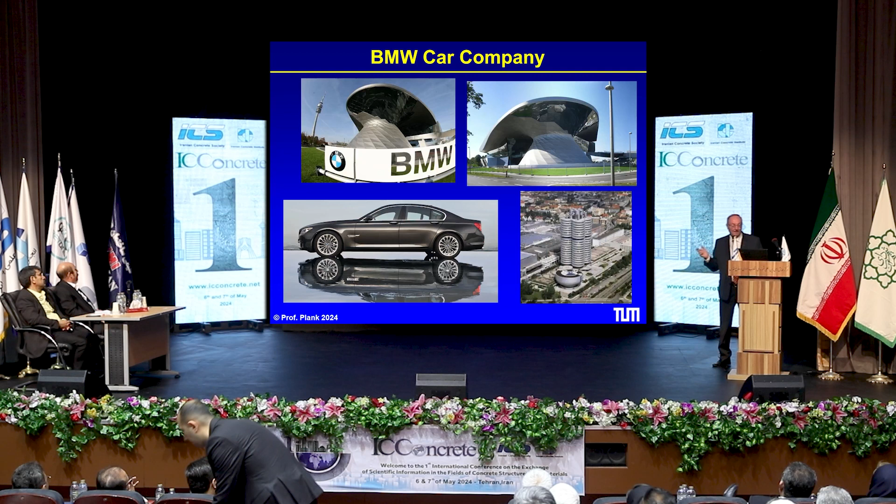A speciality of our university is that we have close links to the industry. And in the Munich area, there are numerous large and also mid-sized companies in different fields like BMW, which you probably know. And our university had some rather well-known students like Rudolf Diesel, who invented the diesel engine, or Willy Messerschmitt, who invented jet propulsion, making it possible to go from the propeller airplane to the jet airplane.

Then our university had 6 Nobel Prize winners so far, and I'm in the chemistry department, and 4 of these Nobel Prize winners are from chemistry.

About our research, we focus on cement chemistry here, and then admixture chemistry. This is really our specialty worldwide. I think we are one of the leading groups in this field. And we study the interaction between cement and admixtures. We also work on other chemical compounds for dry mix mortar and so on.

And from the application, it's concrete, dry mix mortar, energy harvesting materials, as was mentioned. And a speciality in our group is we work on additives for oil well drilling, cementing, and fracturing fluids.

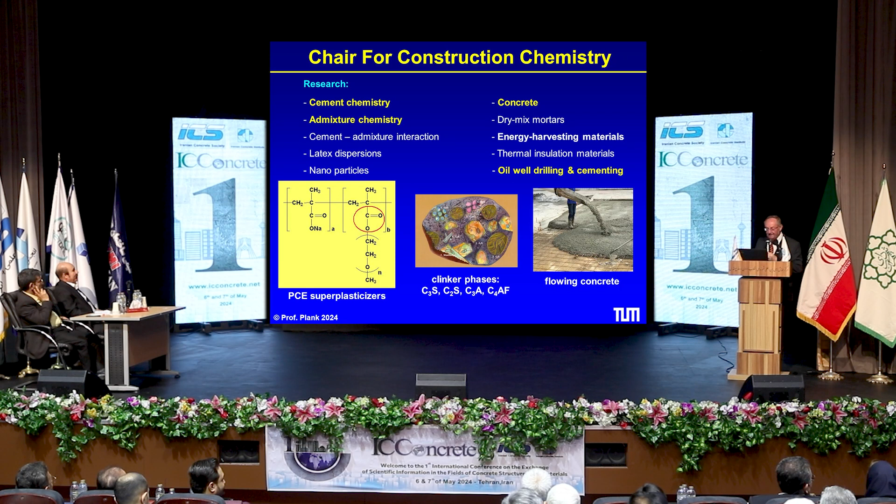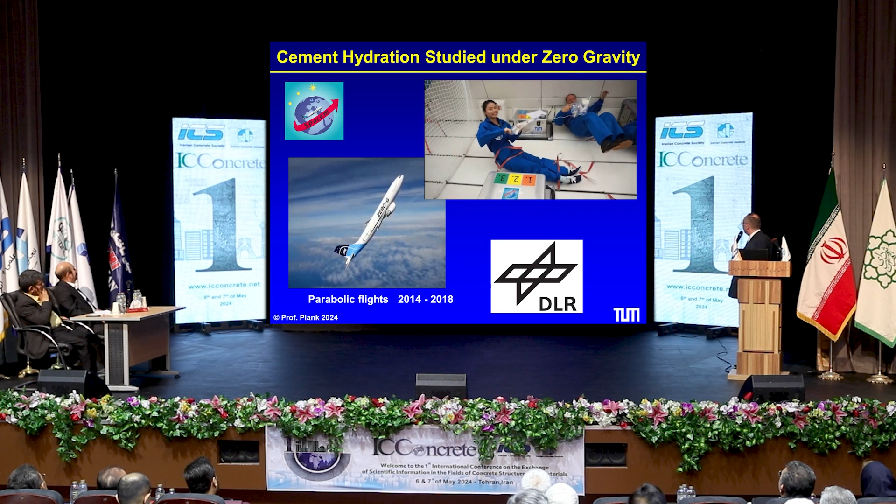We had the unique opportunity to do experiments with cement under zero gravity. As you can see here, we performed them on parabolic flights where you have zero gravity. And by the way, this is Dr. Lei, one of my students who is a professor in China now. We got very interesting insights into the hydration of cement, especially the formation of CSH.

High performance concrete we define as a concrete which reaches very high early strength within a day, ideally within 16 hours, 10 megapascal, and the final strength has to be beyond 60 megapascal, like 100. At the same time, it should be easy to place, fast flowing, and also easy to pump. I will talk especially about this because this is not so easy to achieve in such a concrete.

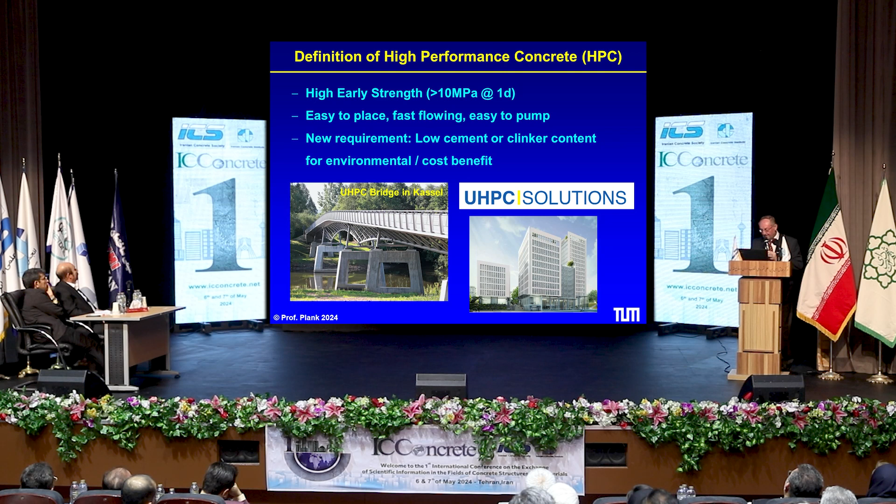And a new requirement is that it should have a low carbon footprint because of a low cement content or a low clinker content. And this is not easy to achieve.

Superplasticizers, PCEs, are necessary to achieve this. At first, a short overview of the PCE technology which we have nowadays. The first PCEs in 1981 were MPEG.

PCEs based on methacrylic acid and methacrylate ester. Then came the allyl ether PCEs from Nippon Oil and Fats. And then at SKW, we developed the VPEG PCE.

This technology was acquired by BASF, as some of you may know. I framed these two in green because these are still the most widely used PCEs in Europe. In Asia, it's completely different. There, HPEG and IPEG or TPEG PCEs are dominating. They have different alcohol here, as you can see, compared to those.

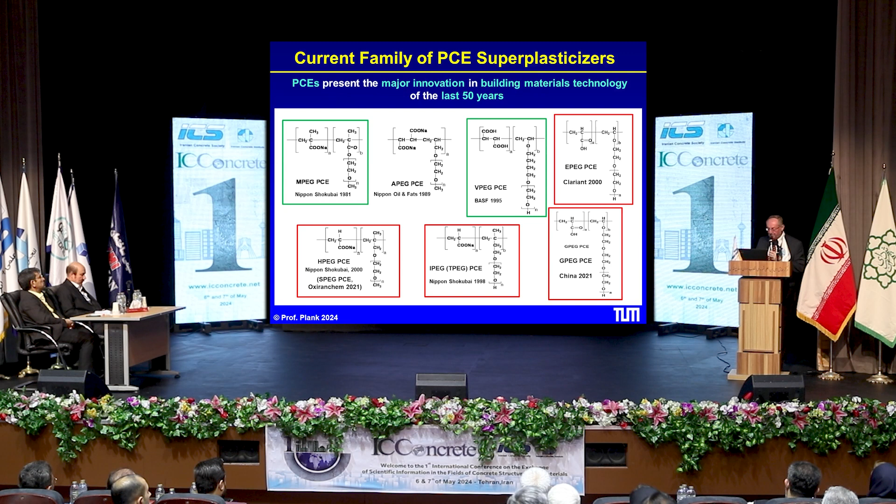Very recently, EPEG PCE, which has an ethylene glycol unit, and GPEG PCE, which has a diethylene glycol unit, were introduced. I will show you later that IPEG is probably the most effective and cost-effective type of PCE. As this is really very new on the market, the PCE industry is continuously developing further. Although it is 40 years of PCEs, it's by no means finished.

Now, the previous speaker talked about water-reducing PCE. Here it shows the structure. This is a high-range water-reducing PCE. It has many carboxylate groups in the main chain and a few but long side chains.

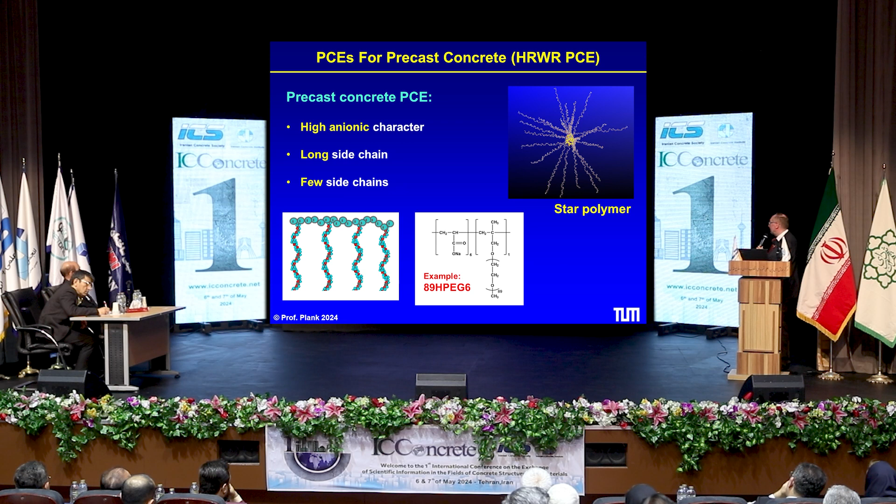This is a typical composition from HPEG PCE. 89 is the number of EO units here, and 6 is the molar ratio of acrylic acid to the macromonomer. So these high-range water-reducing PCEs actually look like a star polymer.

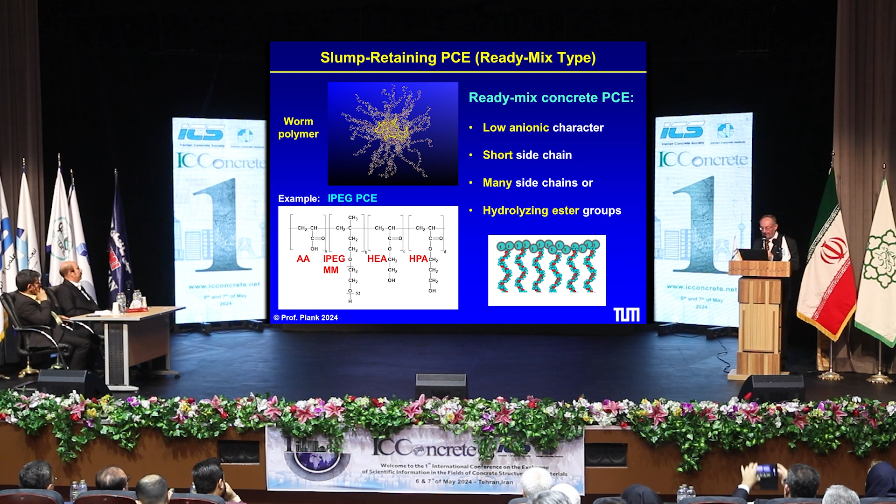Then a slump-retaining PCE, which is used in ready-mix, has many side chains, as you can see here, not so many carboxylate groups. Nowadays we also use hydrolyzing esters in the PCE, hydroxyethyl acrylate and hydroxypropyl acrylate, because they give super long slump retention. You can reach 3 hour, 4 hour of slump retention. In some countries like China, this is very popular.

Then I mentioned EPEG PCEs, where we have the ethylene glycol unit. They were, I should say, again introduced to the market in 2019 in China. Oxiranchem was the first to produce them. And why are they superior?

Their production takes only 1 hour of polymerization time versus 3 hours for HPEG and IPEG, and on top they are also more dosage effective. So this is a very interesting new development, and I'm sure in the industry over the next years we will see more and more EPEG-based PCEs on the market.

Now I come to a major challenge for the cement and concrete industry, and this is the CO2 emission. When we produce 1 ton of Portland cement, we release almost 1 ton of carbon dioxide, and therefore the cement industry contributes very much to the CO2 emission and global warming.

If we look at the list of top cement producers, we see that China is of course #1, followed by India, US, Vietnam, Turkey, and Iran, and Germany. We produce about 30 million tons of cement, so we are a relatively small cement producer.

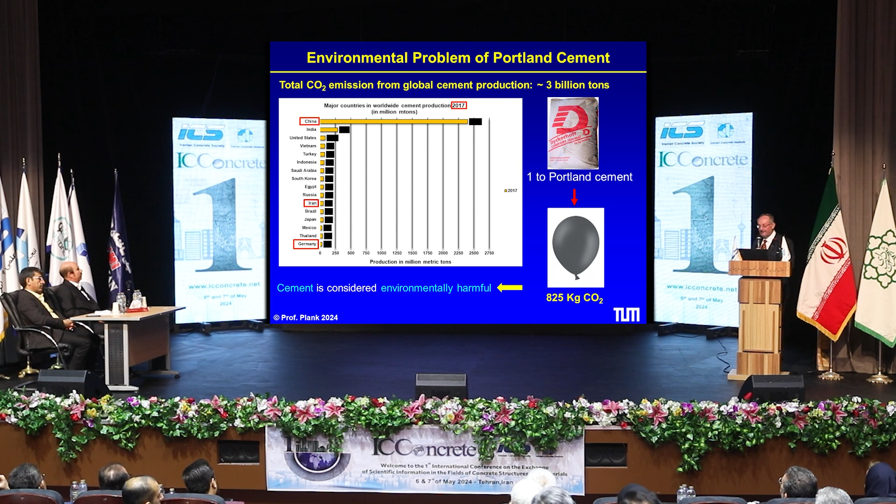But the total global cement industry produces about 8% of the total CO2 which is released. And by the way, this is more than a country like India releases, so it's really significant and we have to do something about it.

What can we do? We can capture the CO2 in the cement plant from the exhaust gas, compress it to a supercritical fluid, and then transport it, let's say, to oil fields and inject it into depleted oil fields. This we call CCS, carbon capture and storage.

It's a good way to dispose of CO2, but very expensive. It's already done in the North Sea, so we know the cost. The cost is about 80 euros per ton of cement, and this cost will be added to cement, so this will make cement very expensive.

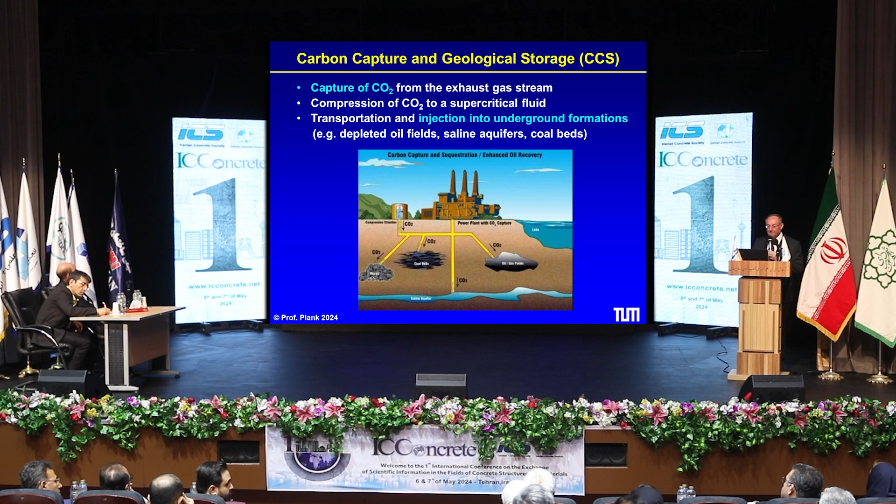The other possibility is that we use pozzolans, as has been mentioned in the presentation before about natural zeolite, and basically reduce the clinker content in the cement by using fly ash, slag, and most recently calcined clay has become very popular. By doing so, it is possible to become climate neutral with the cement formulation.

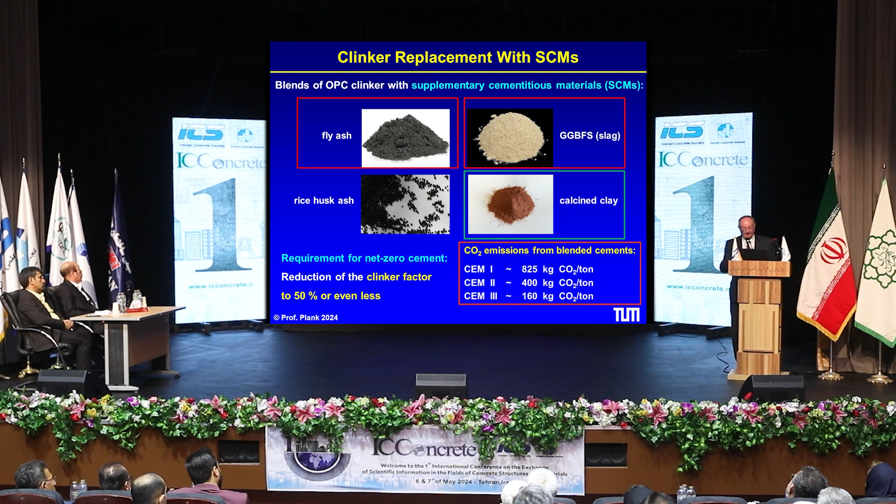We need to be below 450 kilo to be climate neutral, and so this is possible. It means the clinker factor in our cement has to be less than 50%. So for the cement industry, you can see this is a very big challenge and a very big change.

Now, cement comes with a high CO2 emission, concrete actually not. Here we have the global warming potential of concrete. It's 130 kilo CO2 per ton or 300 kilo per cubic meter.

Which is not too high, but the problem is we produce such an enormous high volume of concrete, about 25 billion tons, and therefore this large CO2 footprint. We analyzed the CO2 contribution of different components, and as you can see, cement is 96%.

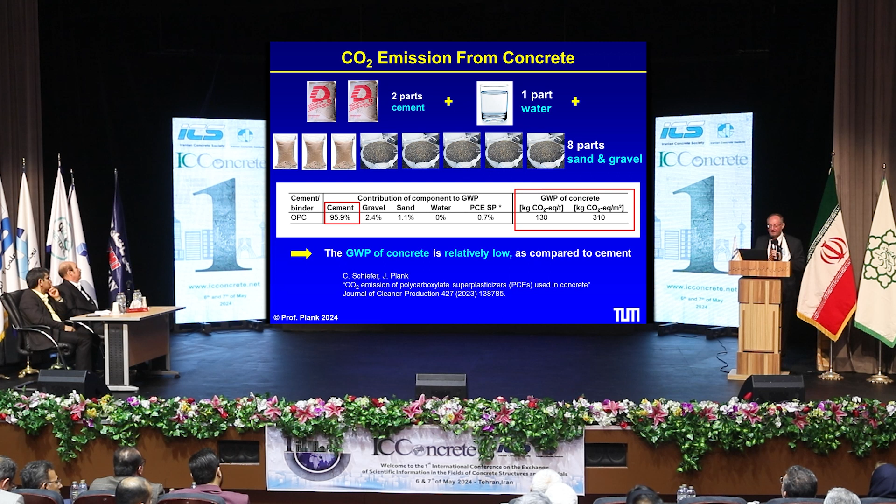This is where the CO2 emission comes from. The PCE is basically close to zero, not important. So the global cement industry has two ways to reduce their CO2 emission. Concept one is this carbon capture and storage.

This allows the industry to keep their current business model, but the cost will be very high. We know in Europe the estimated price for cement with carbon capture will be above 200 euros per ton. I heard that the price of cement in Iran is only 2 or 3 euros per ton.

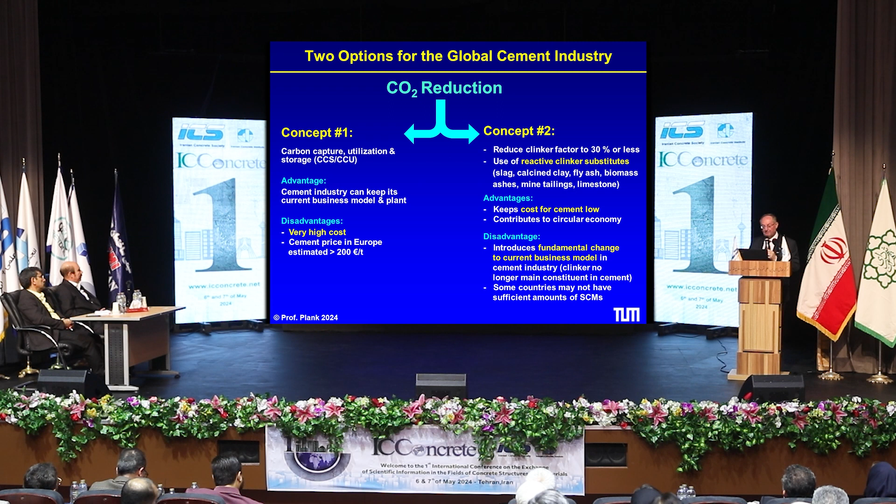So we are far away, and it shows what a cost burden this technology would bring. The other concept is to dilute the clinker with reactive SCMs, such as zeolite. This keeps the cost low, but introduces a fundamental change to the current business model of the cement industry, because clinker becomes a minor component and other materials become the major component. It's a real challenge for their business model. We'll see what the future brings.

About slag cements: especially in countries like Vietnam and India, slags are very abundant, and a lot of work is done there. Also in Western Europe, like UK and France, we cooperated with companies on low clinker cements. We reduced the clinker content to 40%, 30%, 15%, while increasing the slag content. So the clinker is no longer the main component, it's the slag.

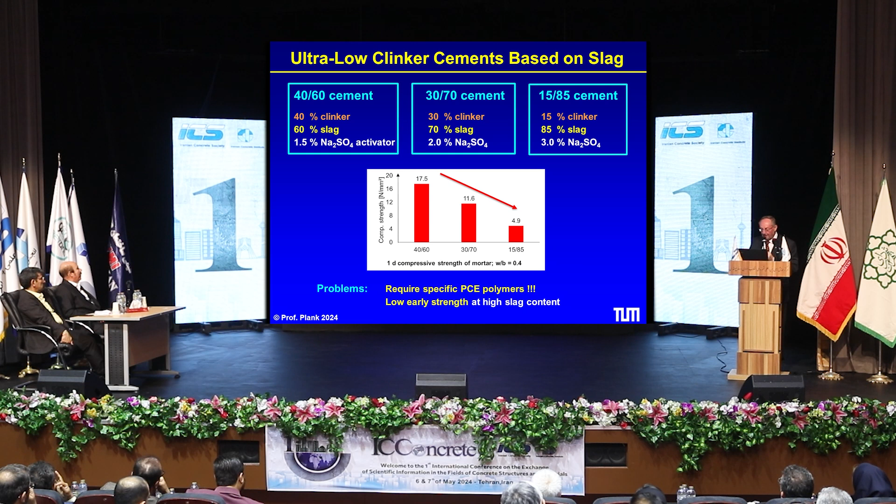Because slag reacts relatively slowly, we need an alkaline activator - here we use sodium sulfate. The problem with reduced clinker content is that the strength gets lower - this is the one-day compressive strength. So we need to find a way to increase strength, and the easiest way is to reduce the water to binder ratio. But then you have a workability problem, and this is where the superplasticizer comes in.

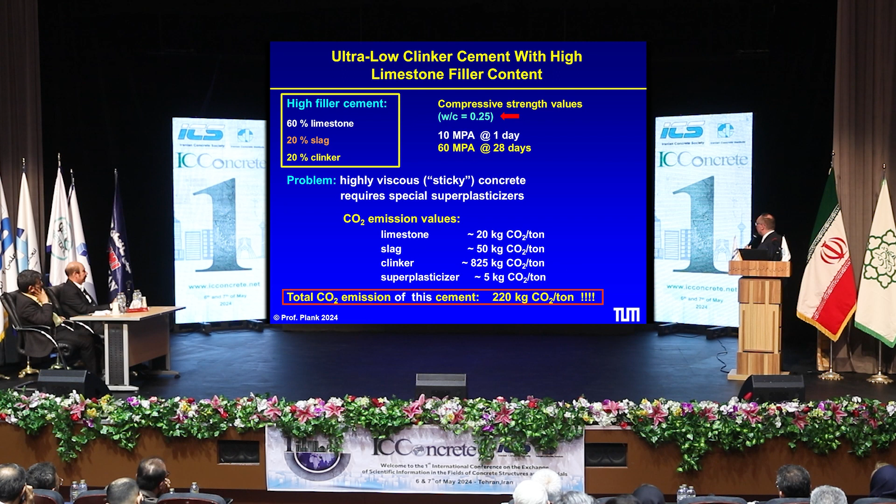So with this cement you have a very low carbon dioxide emission. We call it a climate positive cement, meaning it reduces CO2 emissions more than needed, and still we get very attractive strength data. But the key is the superplasticizer - if you work at this water to cement ratio, you need a very powerful PCE. Some other examples - this is really what we work a lot on in Europe.

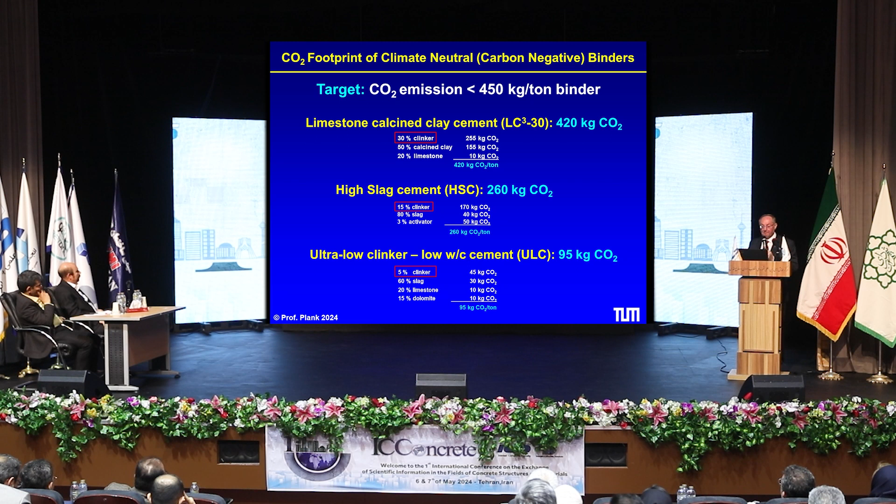These climate neutral, carbon negative binders, like this one with calcined clay - please note it's LC3-30, which means it has only 30% clinker. The common LC3 has 50% clinker and therefore is not climate neutral. Or a high slag content with 80% slag, or this ultra low clinker cement with 5% clinker, which is something they use in India. So you see it's possible to formulate very climate friendly binders.

A problem with slag cements is we need alkaline activators to get early strength, like sodium sulfate, carbonate, silicate, sodium hydroxide, and we use them in relatively high concentration, like 2%, 4%, even 8%. In these activator solutions, normal PCEs are not soluble, and if they don't dissolve in the water, they cannot be active as a superplasticizer. So when we use these binders with these activators, we need new superplasticizers.

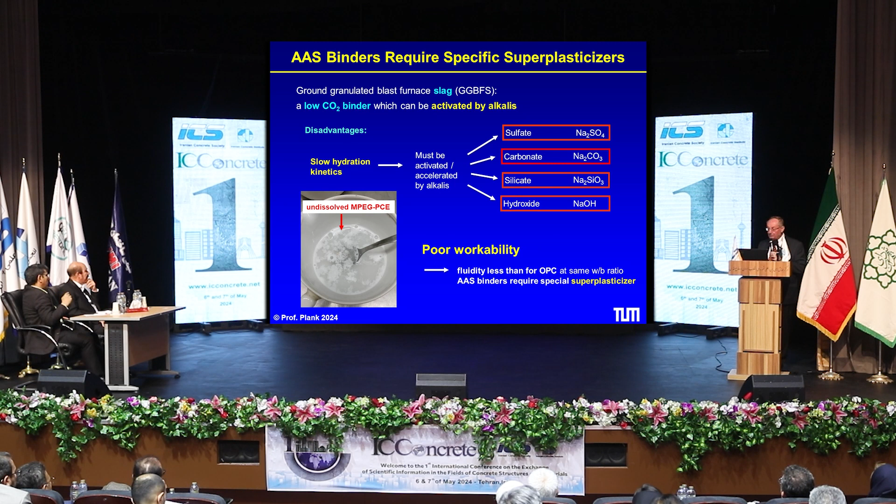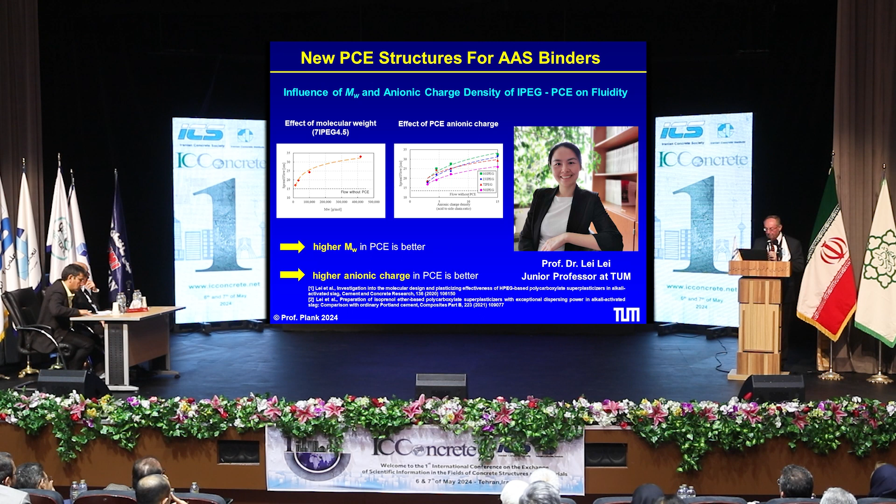Dr. Lei, when she did her habilitation at our university as a junior professor, worked on IPEG or HPEG PCEs, which dissolve in these activator solutions and are effective. She found that you need a higher molecular weight and also a higher anionic charge, and then you have excellent superplasticizers even for those systems.

Another solution for these slag cements are so-called zwitterionic PCEs, where we incorporate a cationic monomer also into the PCE. In a slag cement, they give very good fluidity and also very long slump retention, 3-4 hours, so they work very well. The only slight disadvantage is that at high dosage they reduce the very early strength - this is the one-day strength - but after 3 days there is no such effect anymore.

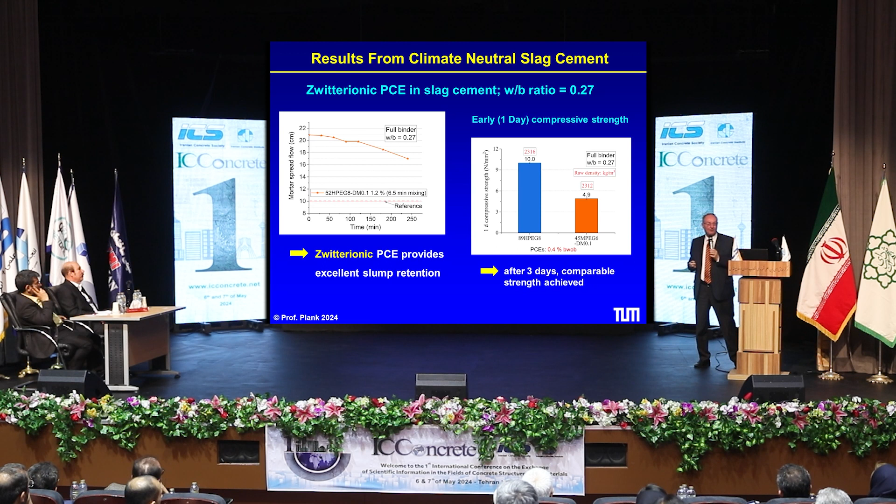So what I want to say is these new green binders require differently composed admixtures. We have to change the molecules to be effective in those systems, and the PCE industry has many ideas how to accomplish this.

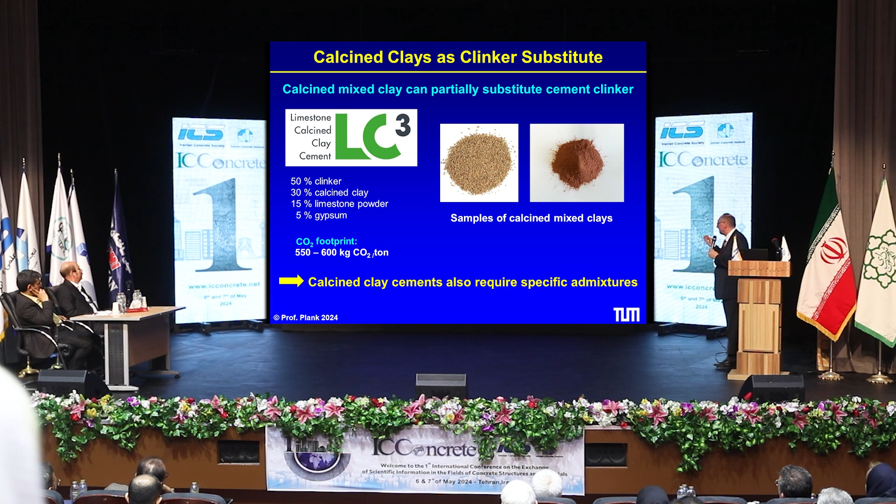Now, calcined clays are talked about a lot, especially LC3. Here you see the LC3 formulation: 50% clinker, 30% calcined clay, 15% limestone powder and gypsum. This has a lower CO2 footprint, but it is not climate neutral. So it's a big step forward, but not what we really need to accomplish, and therefore we are working very hard to improve it.

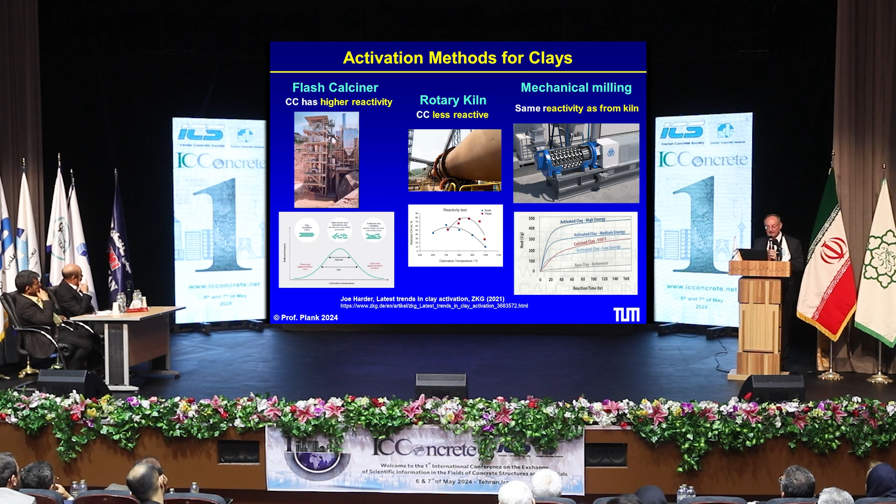Now, calcined clay, there are different ways to do this. In a flash calciner, it gives the highest reactivity of the calcined clay. In a rotary kiln, maybe this is more convenient, but the reactivity is a little bit less. And very recently, ThyssenKrupp introduced a mill where you take the raw clay and just mill it, mechanically activating the clay. It's the cheapest and most convenient way to have activated clay as a clinker replacement.

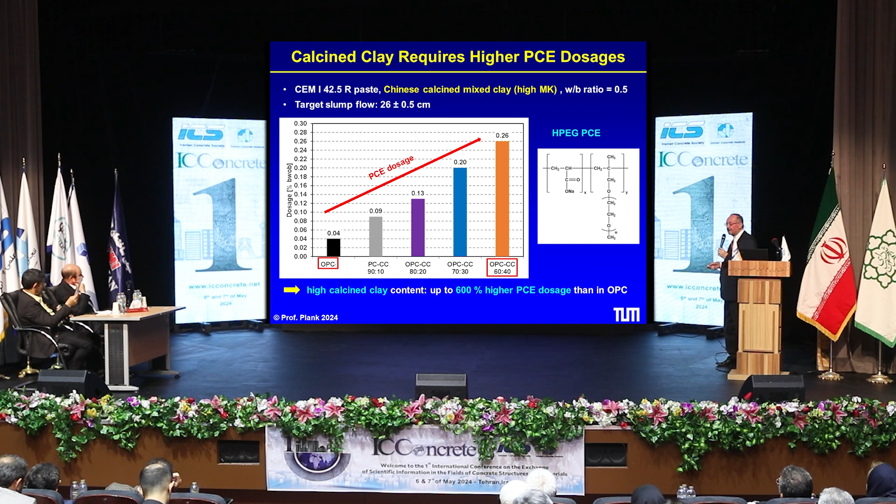Now, a commonly known problem of calcined clays is that they require much higher PCE dosages. If we substitute OPC with calcined clay more and more, you see the PCE dosage goes up very much. Here we use the HPEG PCE, especially here where we used a calcined clay from China with a high metakaolin content. If the metakaolin content is high, this calcined clay needs a very high PCE dosage.

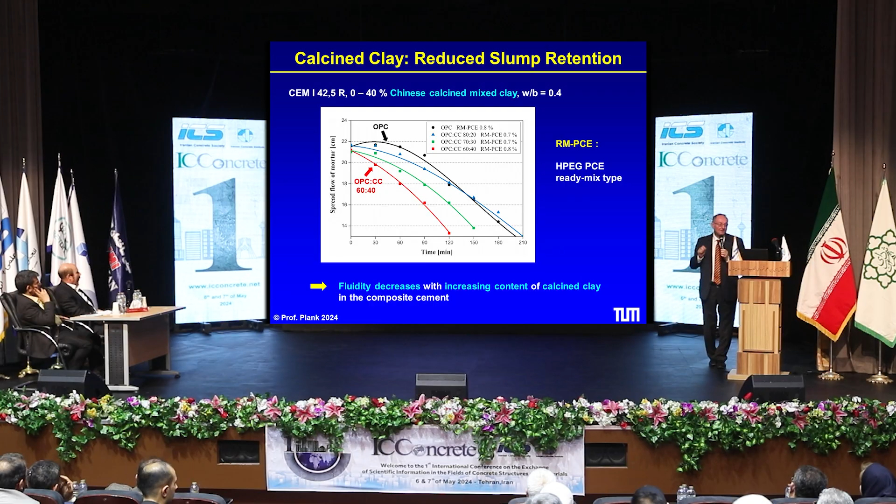Obviously this is not very good because it increases the cost. Another problem of such calcined clays with high metakaolin content is that slump retention is very difficult to accomplish. The previous speaker mentioned this topic of slump retention and the different technologies available, but all these existing technologies do not work in such a blended cement where we have, let's say, 40% calcined clay with high metakaolin content. We and other groups are working very hard on new admixtures which can give reasonable slump retention in those binder systems.

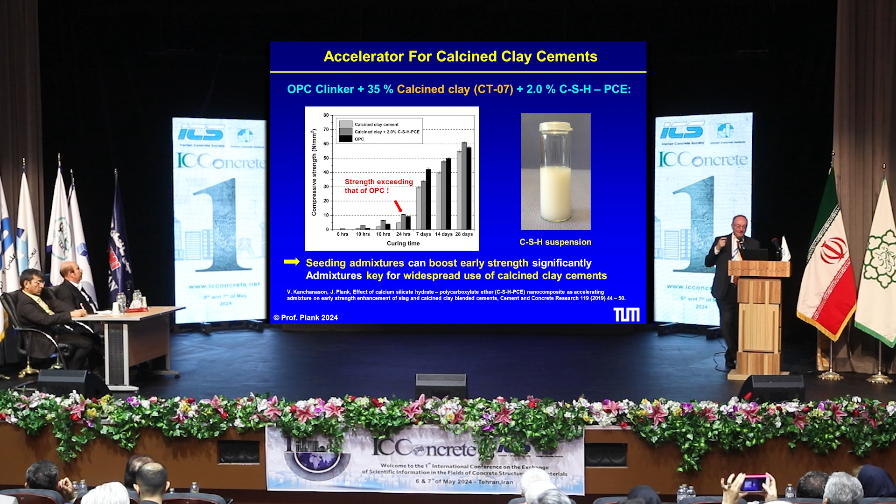So we need an accelerator to get high early strength. In Germany, the one-day strength is very important. The companies always want at least 10 megapascal after one day. So we designed an accelerator, which is a CSH nanoparticle suspension. As you can see in the data here, it gives more than 10 megapascal after one day, after 7 days, and so on. So with these admixture accelerators, we can solve this problem.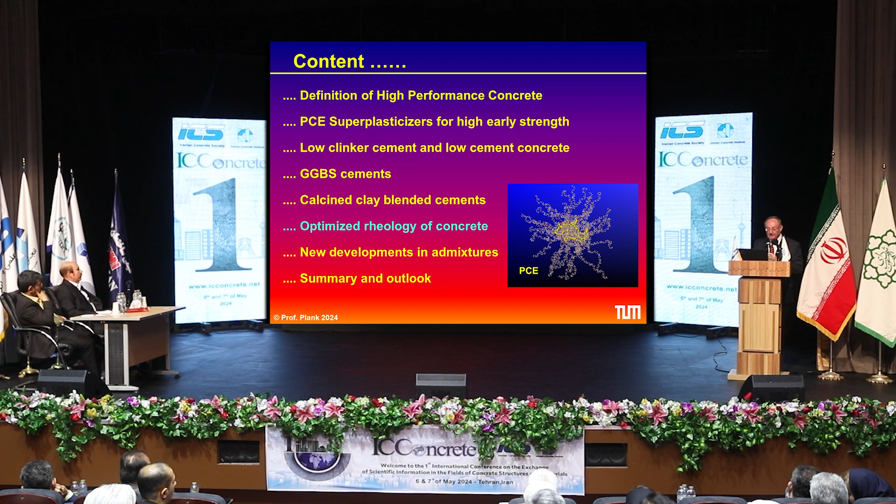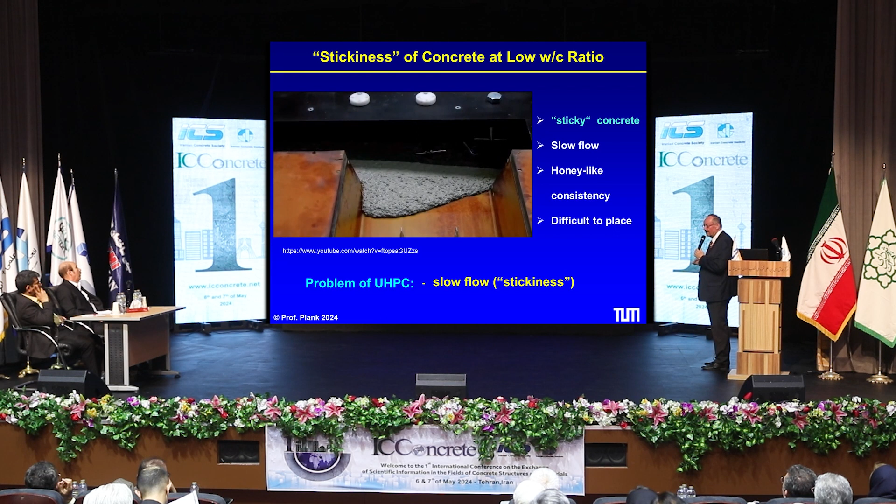Now, let's come to optimized rheology. A big topic in Germany is the stickiness of concrete, and as we go to lower and lower water-to-cement ratios, this problem becomes very severe. Here I show a concrete formulated with a water-to-cement ratio of 0.28, and it flows very nicely but very slowly - it's sticky like honey, and on the job site you don't like this. We tested different PCEs: an allyl ether PCE gives a much higher flow speed than an MPEG PCE. So the type of PCE already has an influence on whether you have more or less stickiness.

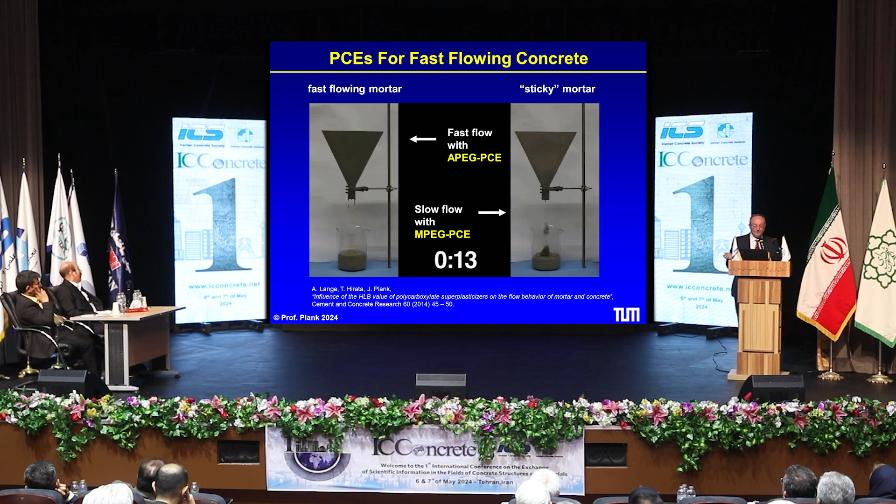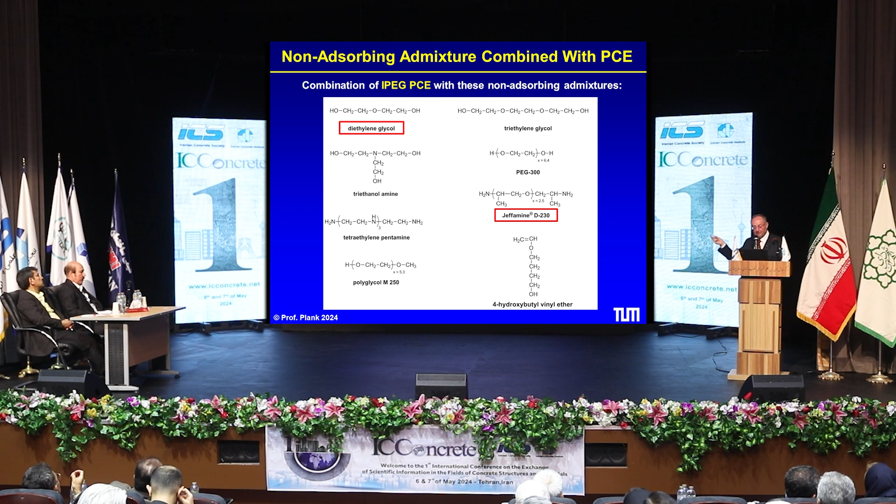But like I said, in Germany we use a lot of MPEG PCE, so the question was how can we also improve the MPEG PCE. The solution we found is that if we combine the PCE with a small molecule alcohol, a diol - for example very simple diethylene glycol or triethylene glycol or PEG 300 - or even some amines which we use as accelerators, you improve the flow speed of concrete very much. So by formulating a PCE solution with these simple alcohols, it's possible to increase the flow speed, and the reason is that they reduce the plastic viscosity of concrete.

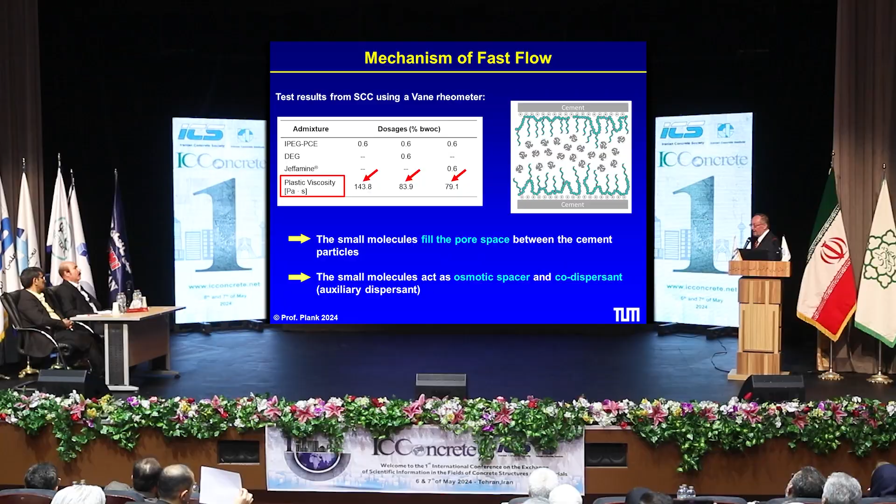As you can see here, this is without such a glycol, here we added diethylene glycol, and here we added Jeffamine. In each case we reduce the plastic viscosity very much. The mechanism is that these alcohols do not adsorb on cement - they are in the pore solution and act as a kind of osmotic spacer between the cement particles which hold the PCE. So for osmotic reasons, the particles cannot come too close together, and then we have a dispersion effect.

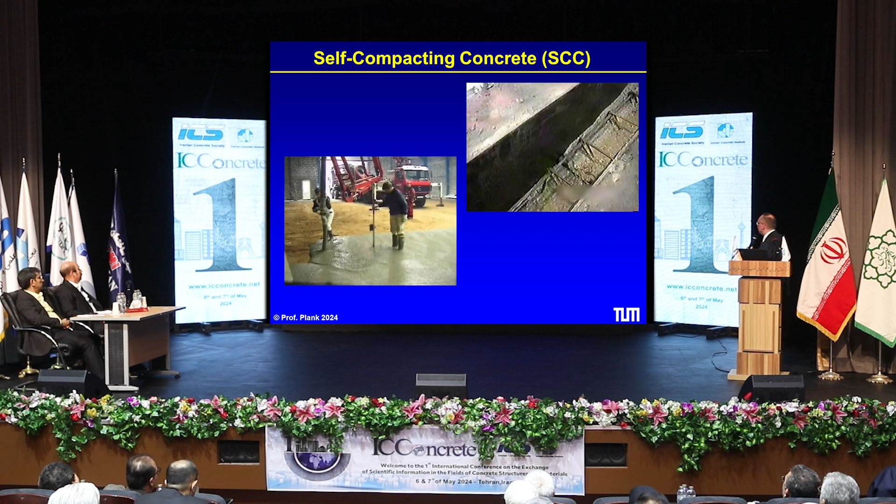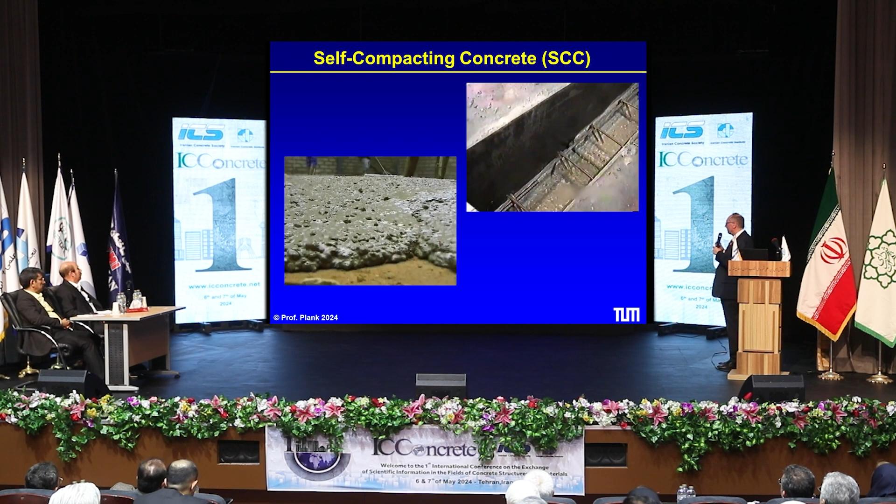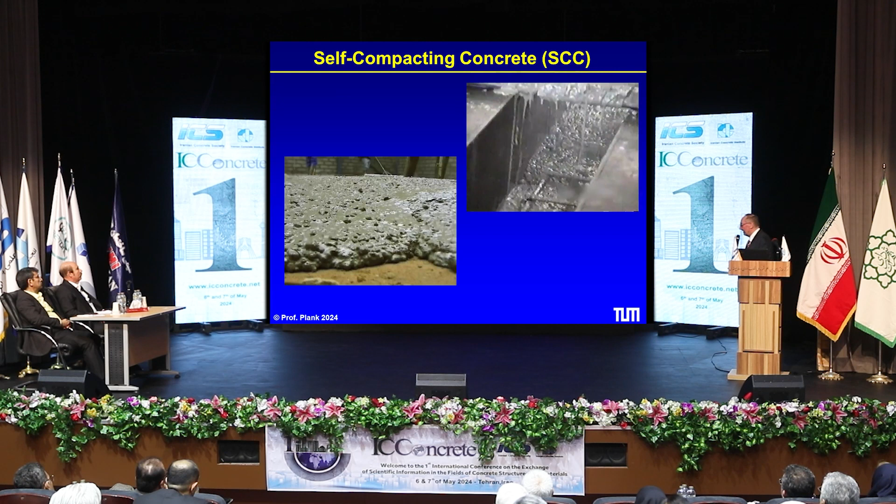Self-compacting concrete, as shown in the presentation before, is very common in Germany. In precast concrete plants, I would say 80% of the concrete produced is self-compacting concrete. This relies heavily on PCE admixtures and specific formulations, and also on mix design, which has been addressed before. Let me show a short video of SCC.

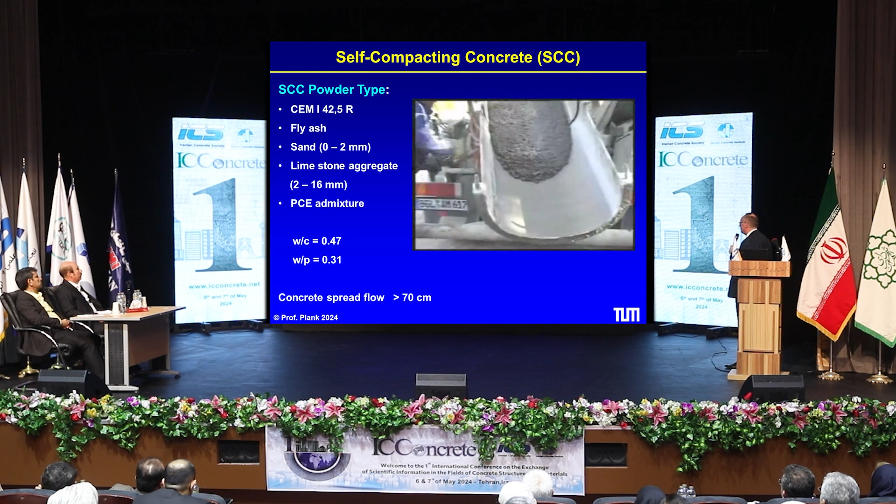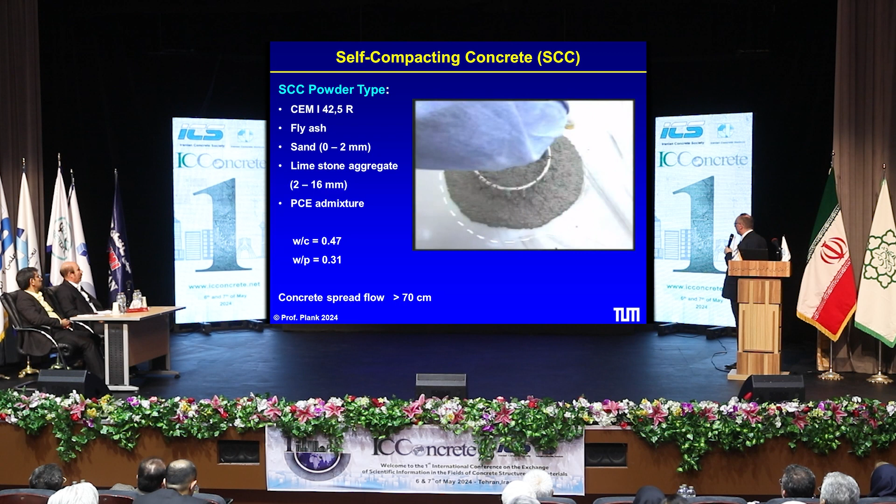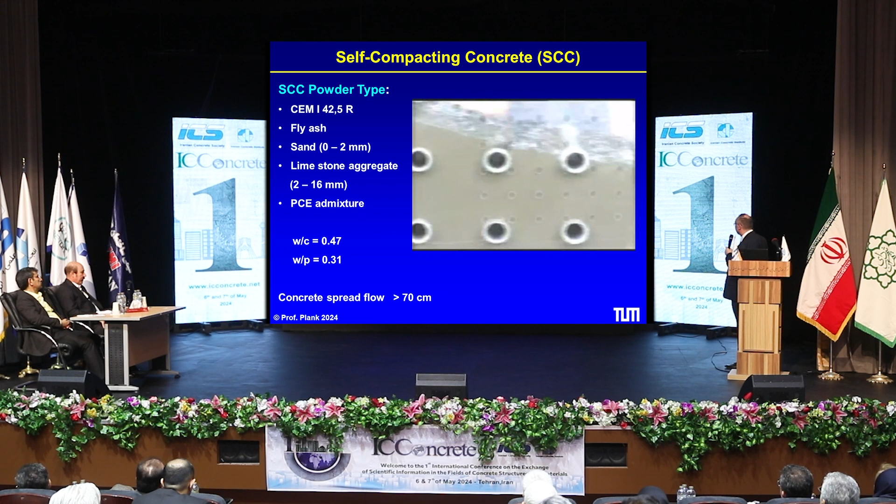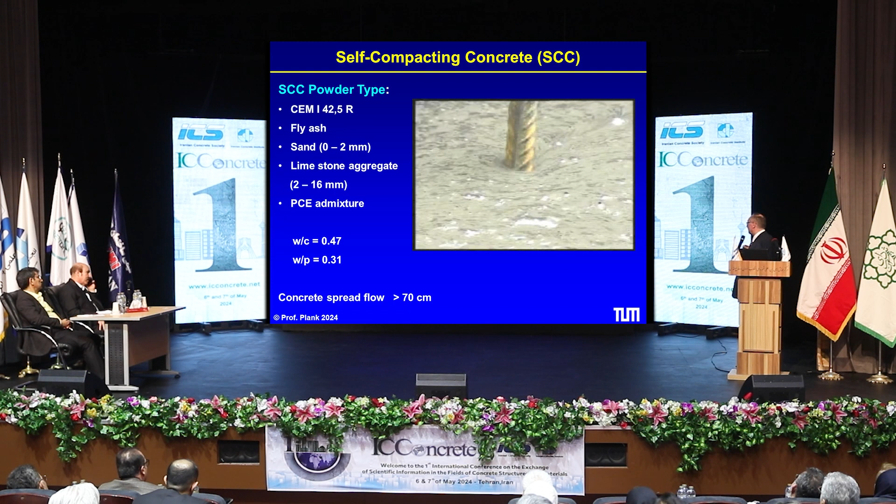We call it a powder type, based on cement, fly ash, sand, limestone aggregate, and a polycarboxylate admixture. This is the J-ring test - you see it has very good flow behavior, no segregation behind the steel bar. This is the L-box test, and you see no voids, no empty space around these pipes. This is a perfect self-compacting concrete, and here you see how it releases the air itself. So SCC doesn't require much compaction - it is self-de-airing, and this is possible with advanced admixtures.

Now, briefly, because of the time, I hope it's okay - just about some very new developments.

When we polymerize PCEs, normally we get what we call a random or statistical distribution of the side chains along the main chain, and such a molecule has a limited ability to interact with the cement surface. But if we can make a gradient polymer where we have some blocks of carboxylate groups, then the interaction is much stronger and we have a more effective molecule.

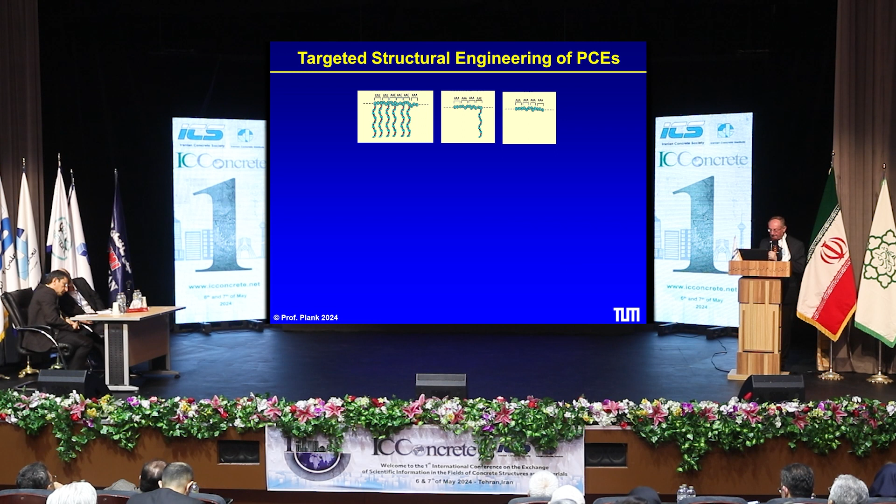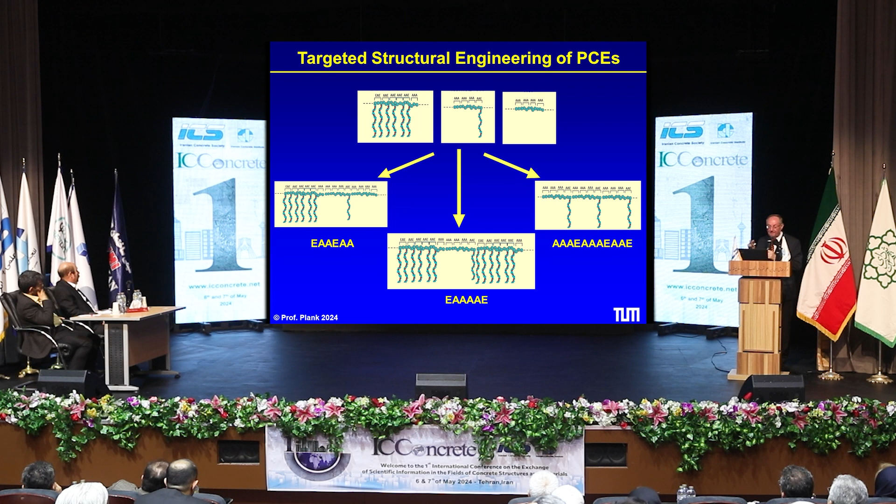This is what we have been working on recently - to design specific PCE structures in a targeted approach. We can now make molecules like this, where we have a block of many side chains and very few here, or two blocks of dense side chains and here no side chain, only carboxylate groups, or mixtures of these. With such targeted design, it is possible to improve PCE performance significantly.

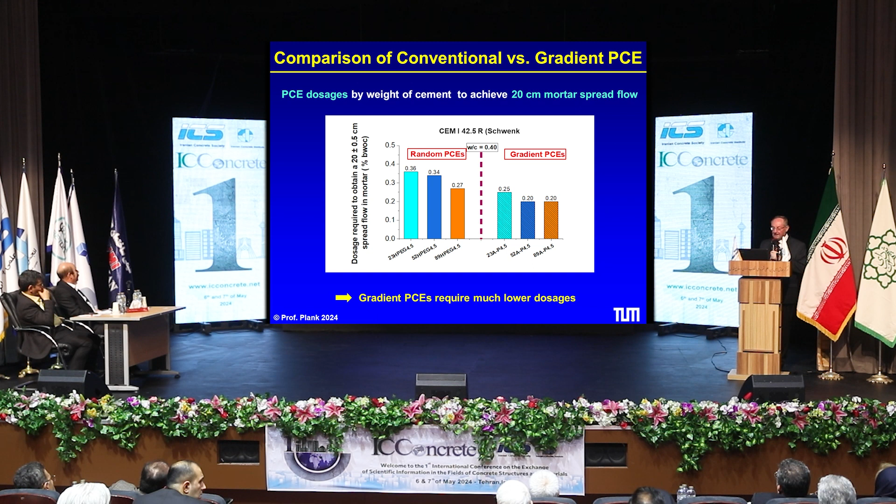Here I show a comparison of different HPEG PCEs with different side chain lengths. The molar ratio is constant, and they are made in the conventional method. These are the dosages needed to reach 20 centimeter spread flow. If we make them as a gradient polymer, the dosages are about one-third lower to get the same spread flow. So these optimized molecular structures can make them a lot more cost effective.

Also recently we did quite some research on what we call amphoteric PCEs, where we also have a cationic monomer - there are different ones in the PCE molecule, so not only a carboxylate but also a cationic group, and these polymers are very interesting for high calcined clay blended cements, for example.

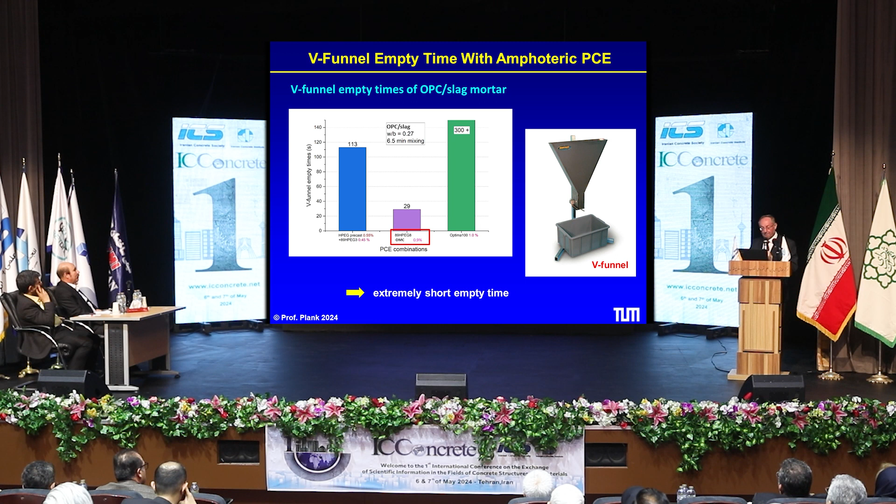So this brings me to the conclusion. I have worked over 40 years in the field of chemical admixtures, and at first, I have to be honest, I found it sometimes a little boring with cement, concrete, and mortar. But we developed products which were used on very spectacular buildings, and seeing that you create something which really makes an impact on this industry gives a lot of satisfaction.

For example, the Petronas Towers in Kuala Lumpur were built with our superplasticizers, with melamine formaldehyde-based superplasticizers. Then the Burj Khalifa used our VPEG PCE from BASF, and the Hassan II mosque in Morocco also used the VPEG PCEs from BASF - just to mention a few examples.

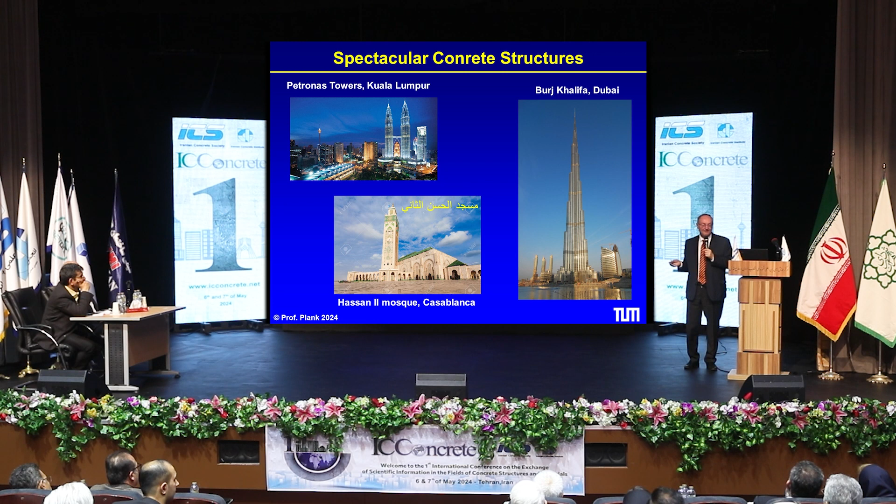So if I'm saying this to the young students here - if you enter this field, you will perhaps also create something where later you can take a look and say, well, we created something really useful, not just a PC program or something which will disappear soon. It has a very lasting effect.

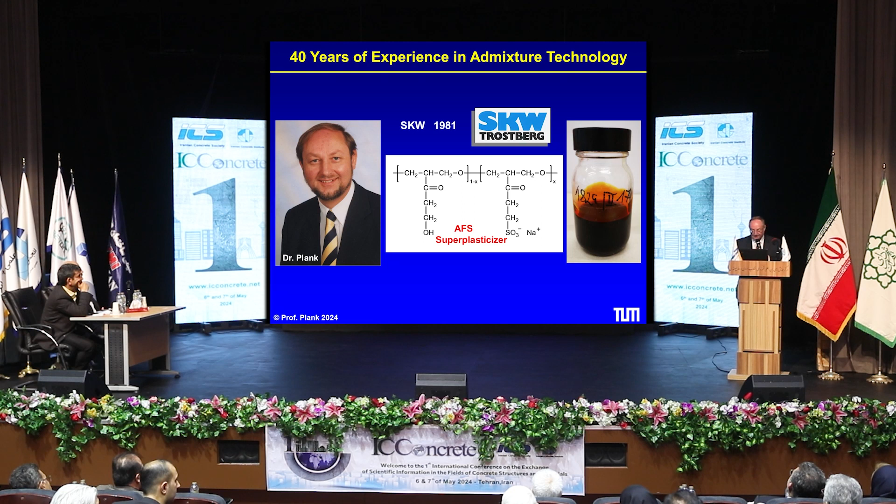Then, I started my work in admixtures in 1981. I joined the company SKW, and my first superplasticizer which I developed was this acetone formaldehyde superplasticizer. This is the original bottle - it was batch number 17 when we were successful, and this is shown in an Admixture museum in China now, where they have very interesting exhibits.

And at SKW, I was a research director, and we developed these VPEG PCEs, which later became known under the label MVA, and the co-worker who did the lab work was Dr.

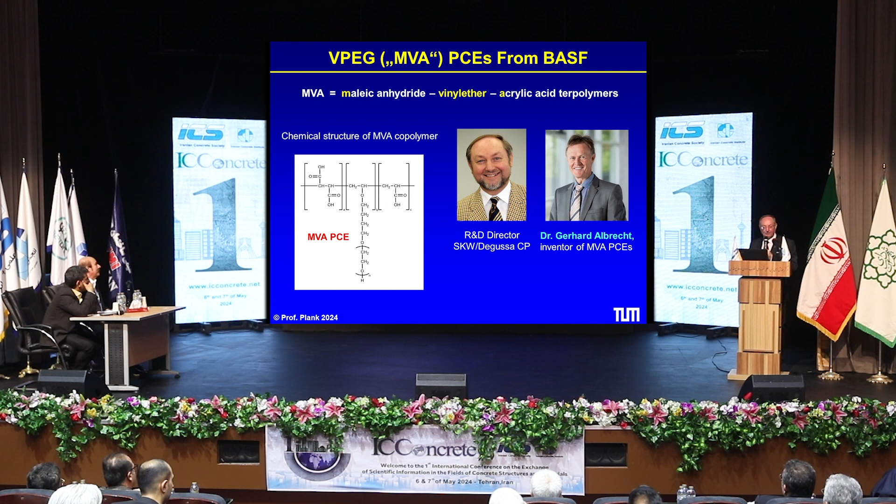Albrecht played a very important role in the recent development of the VPEG PCEs. Let me show what we have contributed with our PCE.

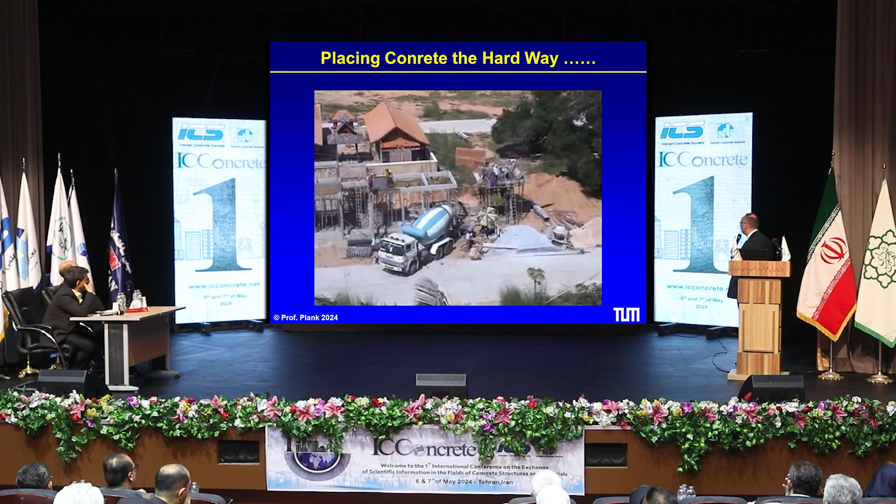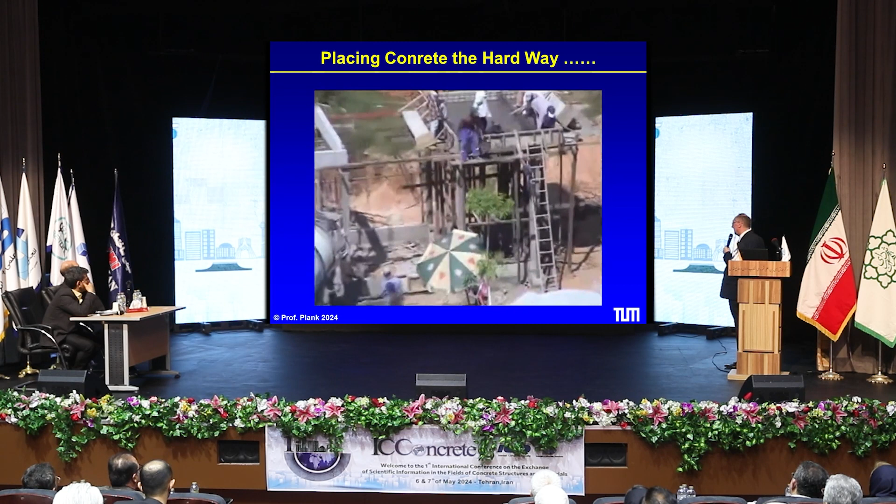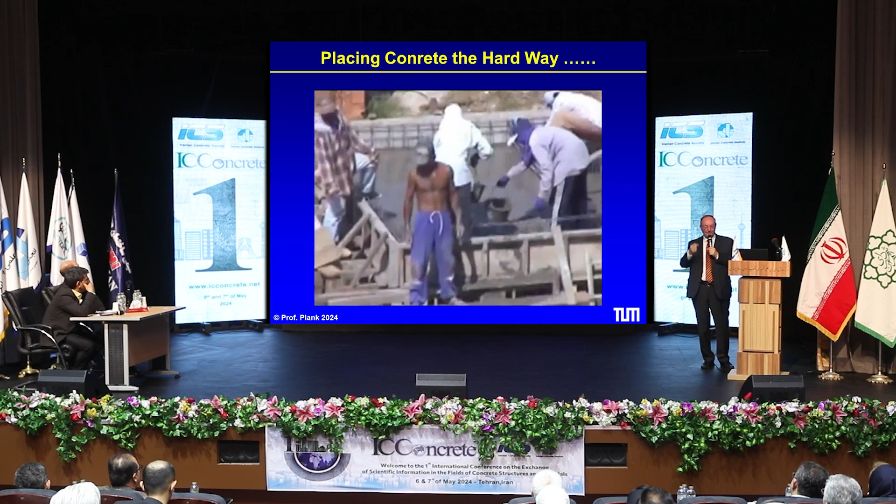This is the old way of delivering concrete upstairs to a house being built here. Look at these guys, very strong, throwing buckets of concrete up to empty a full truckload. This is really hard work.

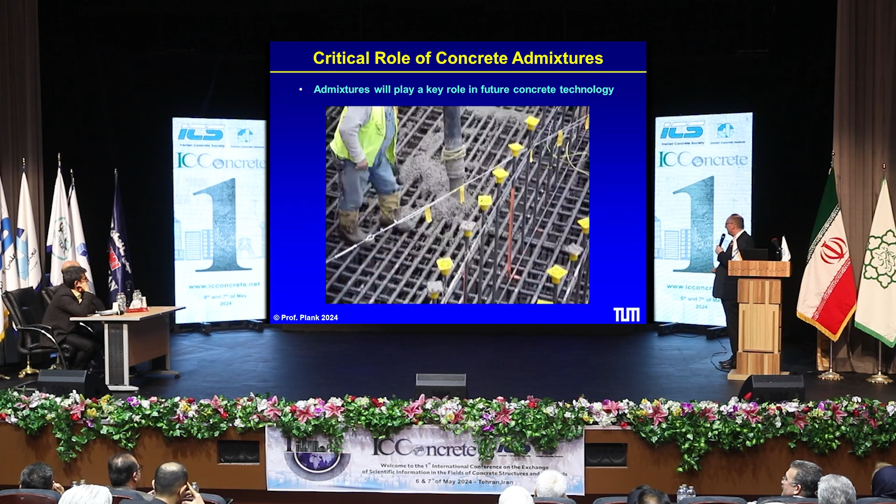This is a job site in Thailand, and the modern way using PCEs is this: we can just dispense the concrete, the worker can watch it and enjoy a drink, no hard work. You see he disposes the bottle in the concrete - that's a modern way of environmental carefulness.

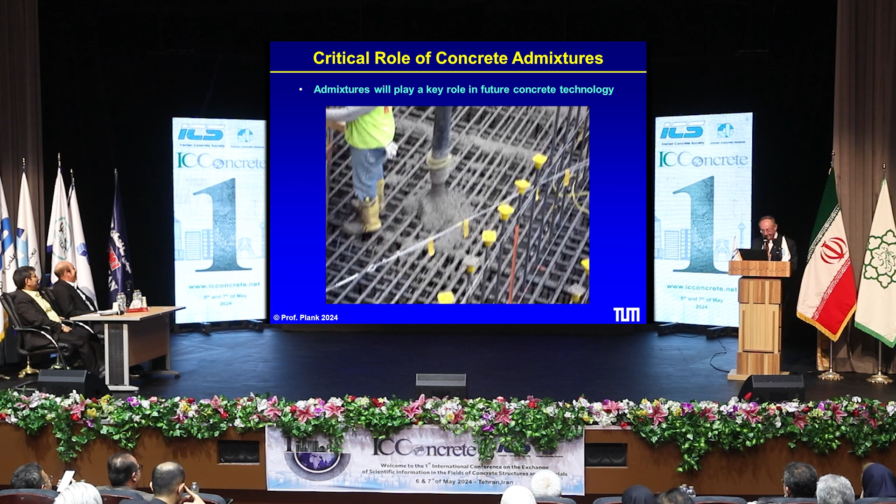We have a very long tradition in PCE research. In 2015 we started to hold an international PCE conference, and since then we do it every 2 years. This year in September we are going to have the 5th international PCE conference. This time it will not be in Munich, Germany, but in Bangkok, Thailand, because many of our attendants in previous conferences said it would be easier to travel there, and maybe also cheaper - Munich is an expensive city. So if you are interested, you are most welcome to join us.